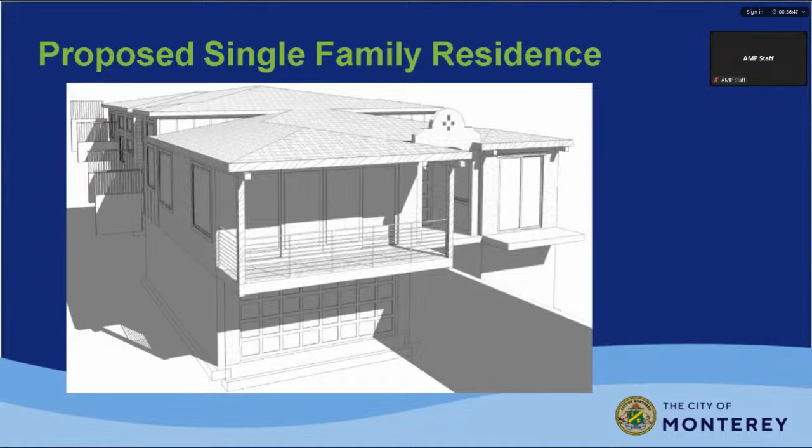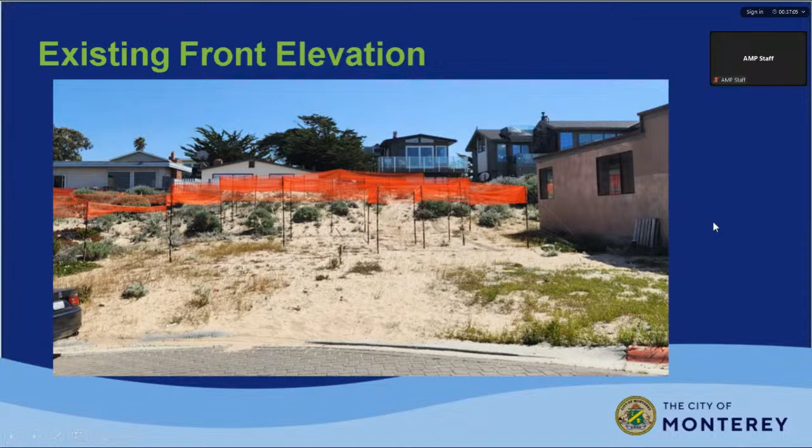The proposed single-family residence would be a main floor with a basement down below. The front elevation shows the primary main floor, and there would be somewhat significant excavation down below for the subfloor area, similar to nearby properties in Del Monte Beach.

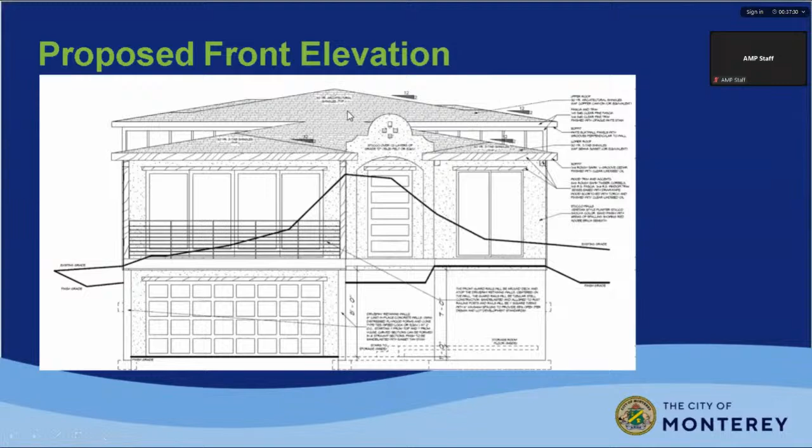The proposed front elevation has a front deck area here, the primary entrance here with a pathway going to the front. There would be a driveway going down to a two-car garage down here on the left, and the building would go up the slope to the rear as depicted here.

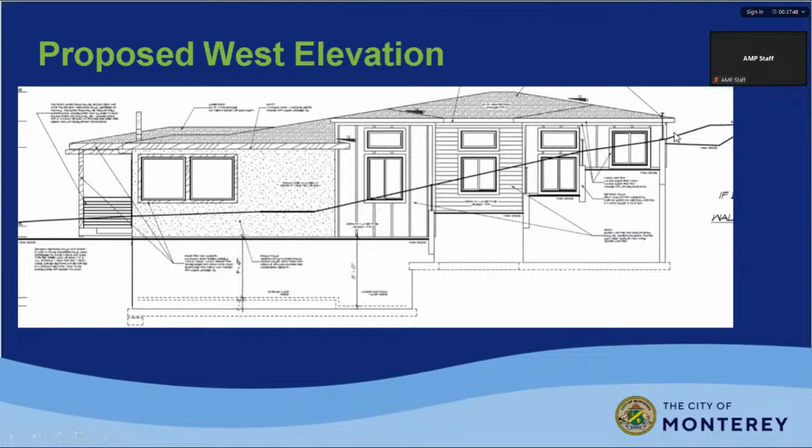There would be a combination of stucco and wood paneling, and the rise of the roof would go up with the rise of the slope to the back, where there would be a small portion that would project above the grade. So this back area would wind up being a retaining wall, and then further forward it would step down to the garage area.

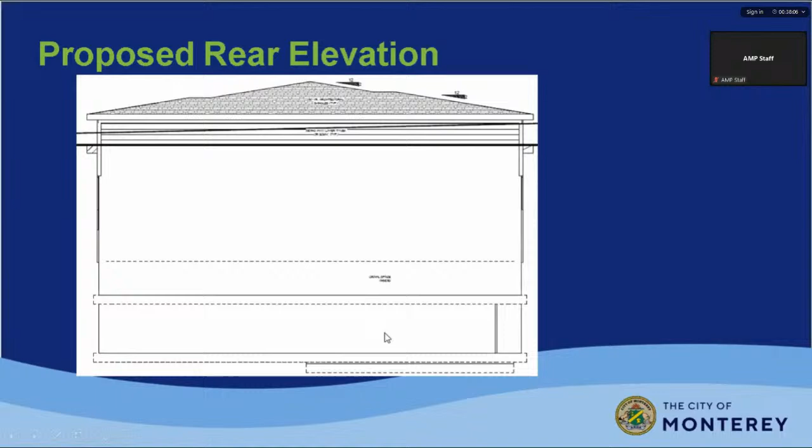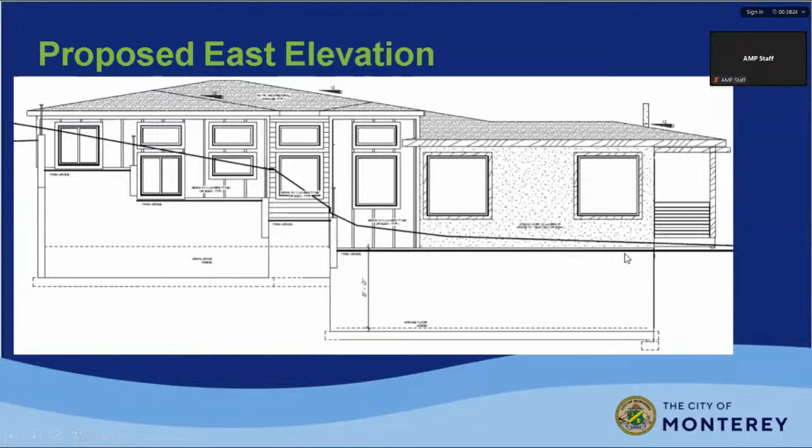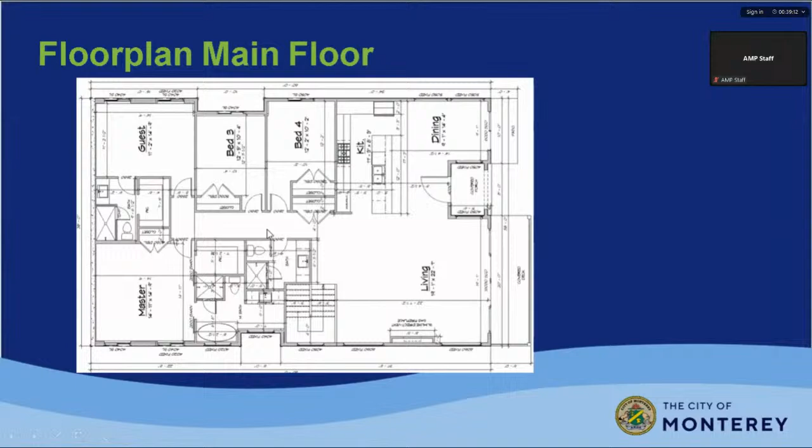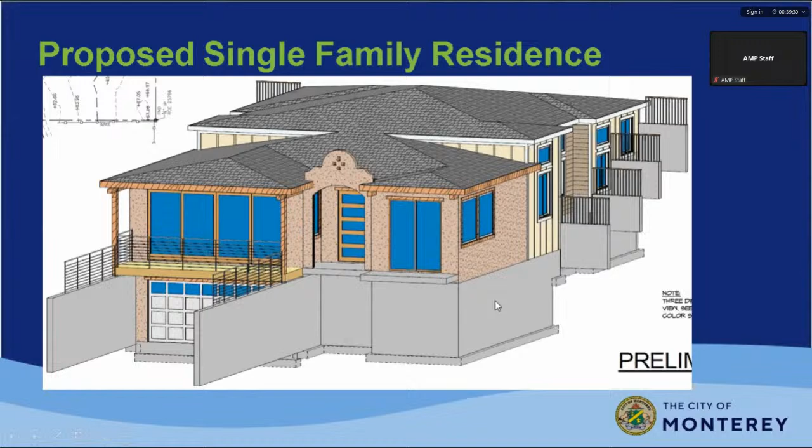There are a series of findings required for approval from the Architecture Review Committee, including that the proposed siting, form, mass, and architectural style are appropriate. The project as proposed meets all of the development standards. There's an asterisk because we have a clarifying condition that we included.

But each of these defer to the Del Monte Beach, Monterey Shores neighborhood development standards. And this area in particular is subject to a few height and setback constraints that were codified a little over 20 years ago.

The views, privacy, and living environment must be found to not be significantly impaired. One comment was received prior to the last meeting with concerns about the story pole height.

The applicant had a surveyor go out, and the poles were indeed incorrect. The poles were revised, brought to the correct level, and a stamped survey was provided to the city confirming that the story poles are now the correct height. We have not received a follow-up concern about the story pole height.

However, we have received one other comment letter with some view impacts, which I'll go over in a couple slides. I mentioned that there was a map for this area. On the right, you can see there is a maximum vertical building envelope allowed for the property. Lot 11 here is allowed to go up to 71 feet in elevation.

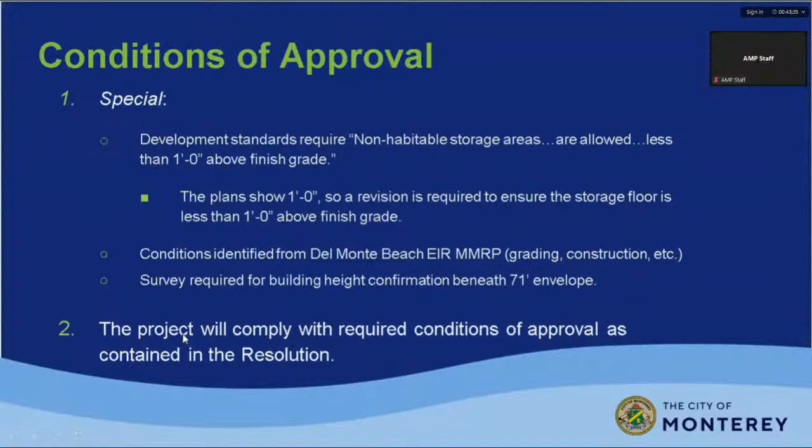The project would otherwise comply with the standard conditions of approval placed on other projects. We received one public comment letter following the initial one about the story poles, with concerns about the setback and slope—that 5 feet was rather close to their property line—and a request that the front setback be reduced so it could be moved further away from their property.

As I mentioned before, the map is very clear about the setbacks, and going for a setback variation is not possible. It would be extremely complicated to go back through the EIR process for that.

There were concerns about vibration and structural damage, and an excavation and shoring plan being required. As mentioned, there are a series of special conditions, 2 through 15, placed on this project for those items. Finally, there was a concern that a fence may be installed in the future on the rear property line that could impact their view.

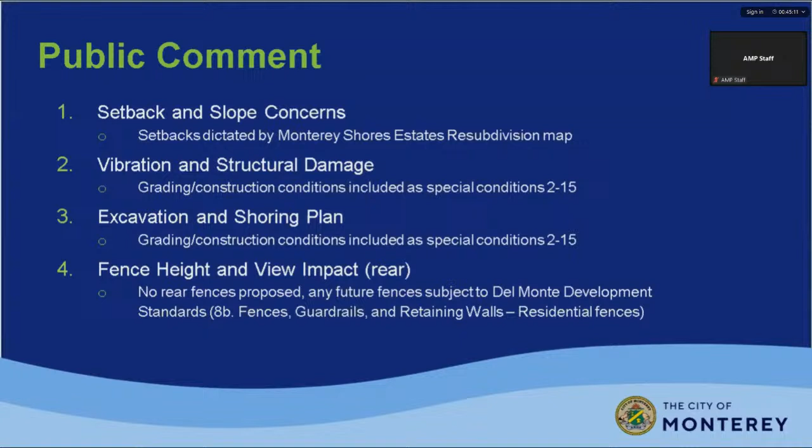As proposed under this project, there is no fence proposed along the rear, and any future fences would be subject to the Del Monte development standard document, specifically section 8B regarding fences, guardrails, retaining walls, and residential fences. So if something came up in the future and there was a complaint, we would send code enforcement to ensure they were going through the right process.

With that, staff's recommendation is that ARC adopt the resolution approving the architectural review permit and conditions of approval. That concludes staff's presentation. I believe the applicant is online, and if you have any questions, I'm here. Thank you, Matthew. Matthew, any questions?

So the water for this site is allowed to be there. It is, and Fernando may be able to talk a little more about the history of this area, but water is allowed at this site. Yeah, there was a development agreement approved by the city council that gives water to this property, and it's been renewed because this EIR is from 1998. So it's been renewed and kept alive.

If there currently isn't, there is one allowed to be placed there.

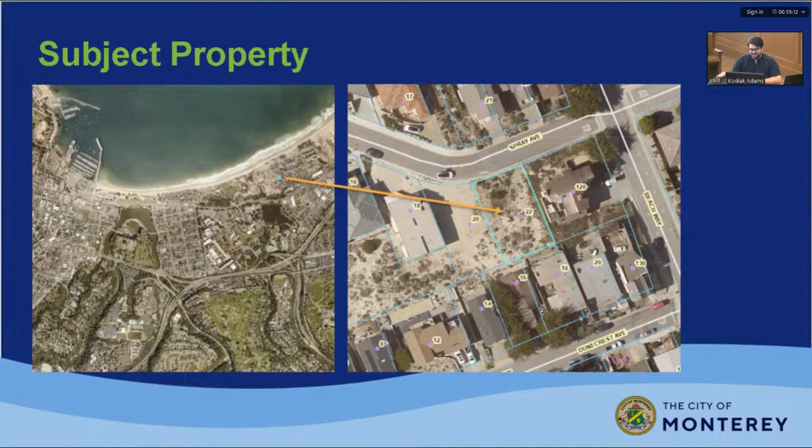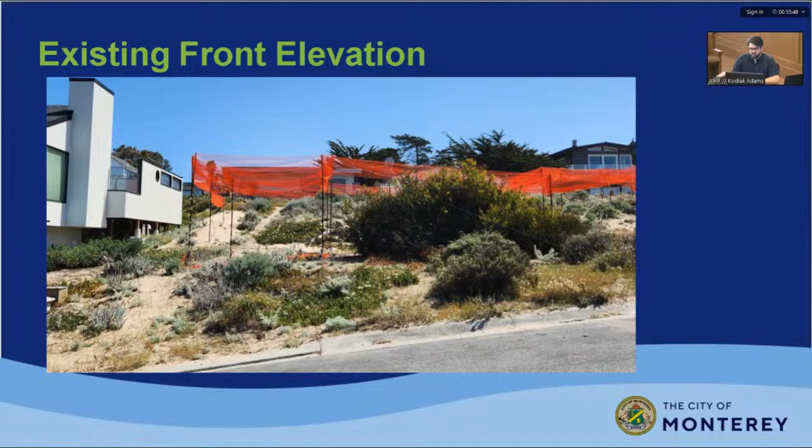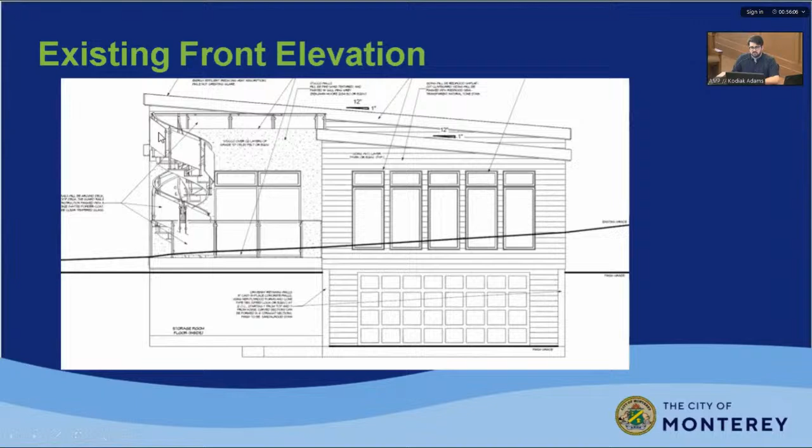Here is what the project would look like. As mentioned before, there would be a downslope driveway from the left to the garage door on the right. There's a spiral staircase going up to a rooftop deck, and these would each be glass here, and the slanted roof.

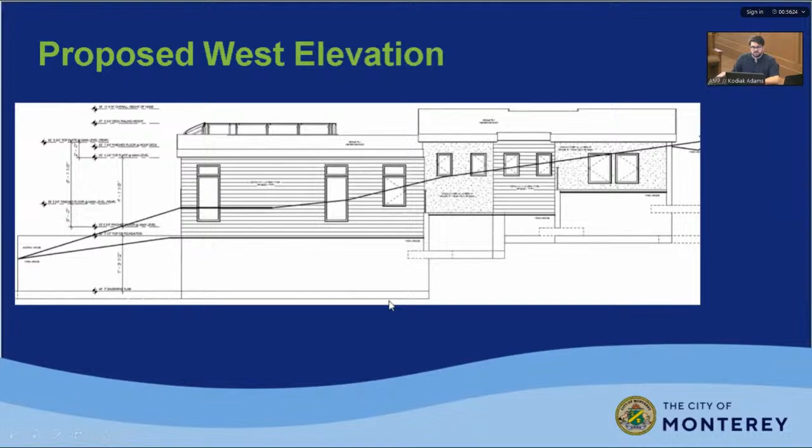The project would similarly go up the site, and you can see the basement slab down below with the garage, and there is a tiered retaining wall system going up towards the rear of the structure, where it would slant from left to upper right.

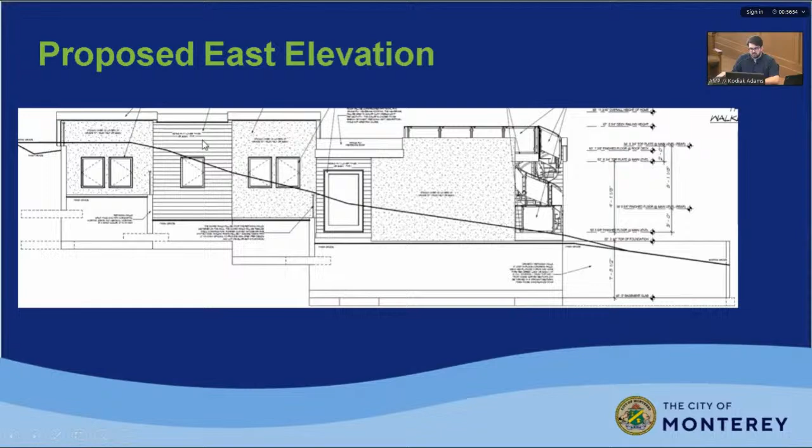The proposed east elevation is here. The front door is located on the side of the house for this one with a walkway to the front. And again, you can see a combination of stucco and wood siding with a slightly different color scheme, but still similar neutrals and grays.

The lower floor plan, here we have the garage, this time on the right of the structure, and the storage area over here. There's also a stairway that goes up. I will note the same condition that was on the other one, where it needed to be less than 1 foot, is also included for this project for that storage area. Oh, and the crawl space is the same as well on the left.

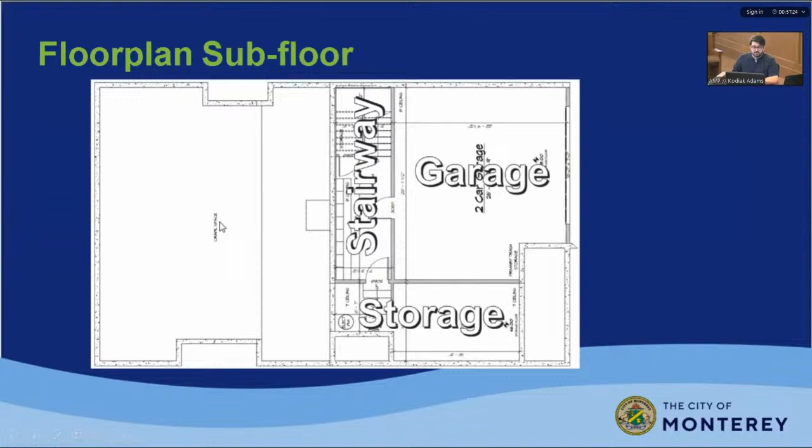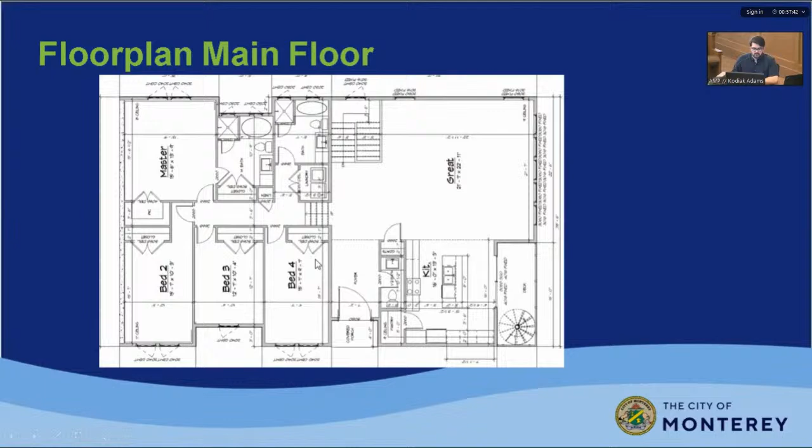The great room would be at the front next to the windows that were indicated. The kitchen would go out to the balcony area, to the deck with the spiral staircase up to that rooftop deck above the kitchen. And there would be a number of bedrooms and a master bath and a master bedroom. Here's an alternative angle, and here you can also see the retaining walls going up the slope.

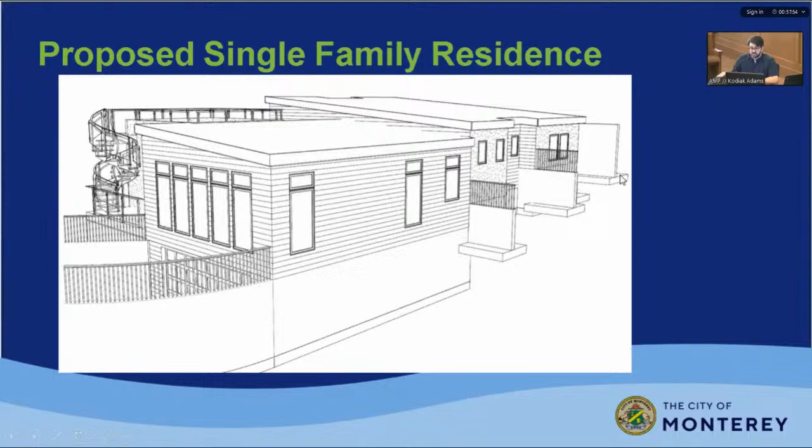Findings required for approval are that the siting, form, mass, and architectural style are appropriate. All features of this proposal were also found to be consistent, adhering to that maximum height requirement for the Del Monte Beach area. Views, privacy, and living environment should not be impaired. The previous comment that was noted about the story pole concern was directed at this property as well.

Since the revision of story poles, we have not received a comment in writing about concerns about the height. Otherwise, it does adhere to the envelope from the final map. Unlike the other site, this one drops down a little bit with the topography to a maximum height of 69 feet. The setbacks on the rear are 5 feet from both of these sides. However, it is otherwise indicated as 10 feet from this side, on the east side of the property, and the plans do adhere to that. And there's a 20-foot setback in the front.

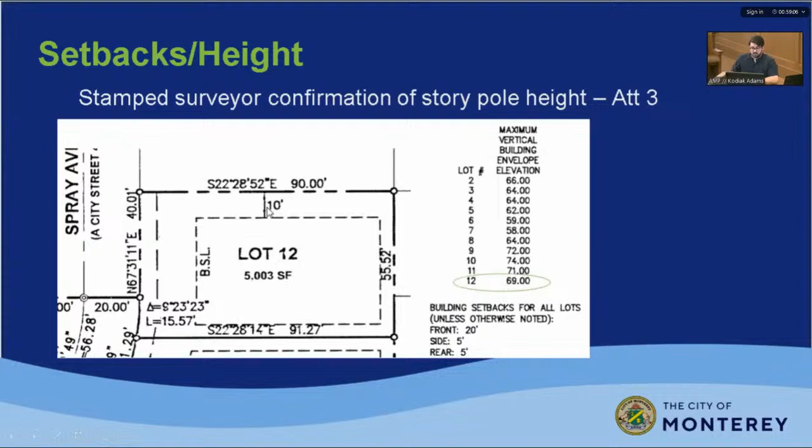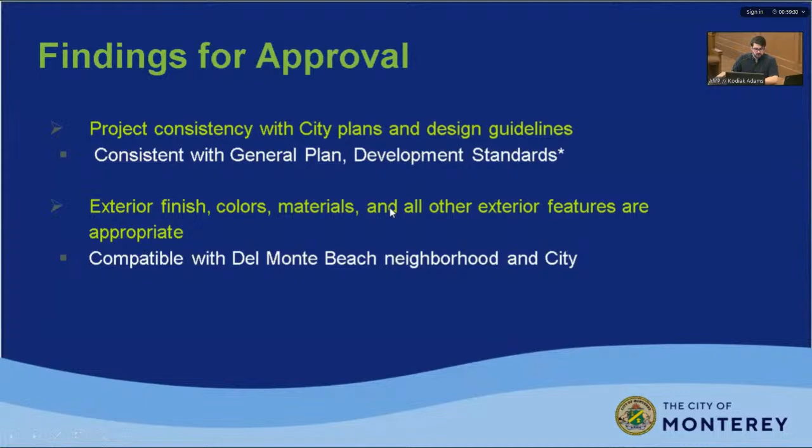The project must be found consistent with city plans and design guidelines. It is wholly consistent with the development standards from that neighborhood plan, except for the special condition. The exterior finish, materials, and other exterior features must be found appropriate, and staff found they were compatible.

There is a special condition about the 1 foot above finished grade, and the plans show 1 foot, so revision is required to ensure that it's less. There was one other note included in the plans marking a maximum 7-foot high ceiling for the storage area and maximum 8-foot high for the garage. Staff would like it depicted on the elevations as well. It was included on the plans, nothing was wrong, just wanted it to be cohesive throughout the document.

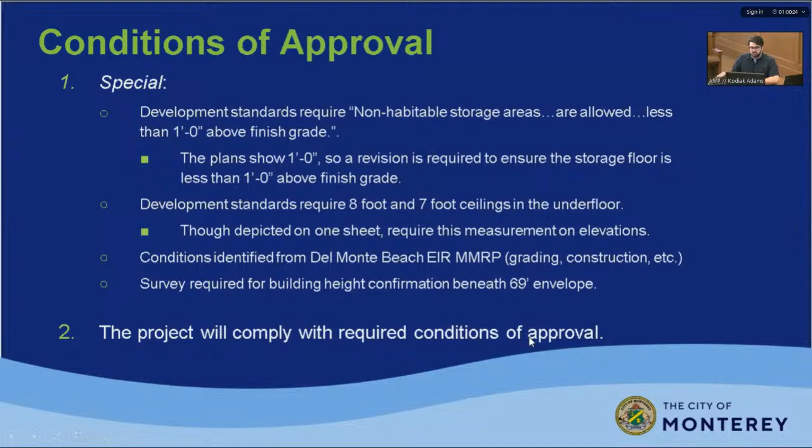Similar to the other project, those conditions from the Del Monte Beach EIR MMRP for grading and construction are included here as well, in addition to the survey required for the height confirmation for the 69-foot height limit. Otherwise, the city standard of conditions also apply to this project.

The previous public comment that was noted was also directed at this project, and the same responses are included here as well for setback, slope concerns, construction related items and excavation, and fence heights. There is no proposed rear fence for this one. Anything that comes up in the future would need to adhere to the Del Monte development standards.

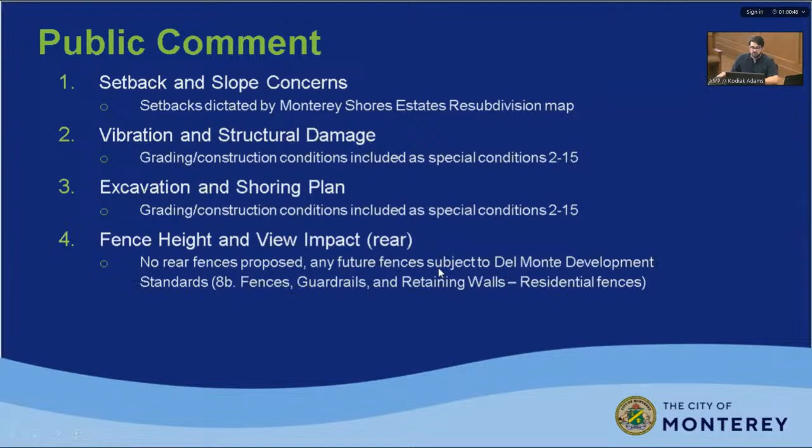With that, staff's recommendation is that ARC adopt the resolution approving the architectural review permit with conditions of approval. This concludes staff's presentation, and the applicant is here. Thank you, Matthew. Matthew, any questions?

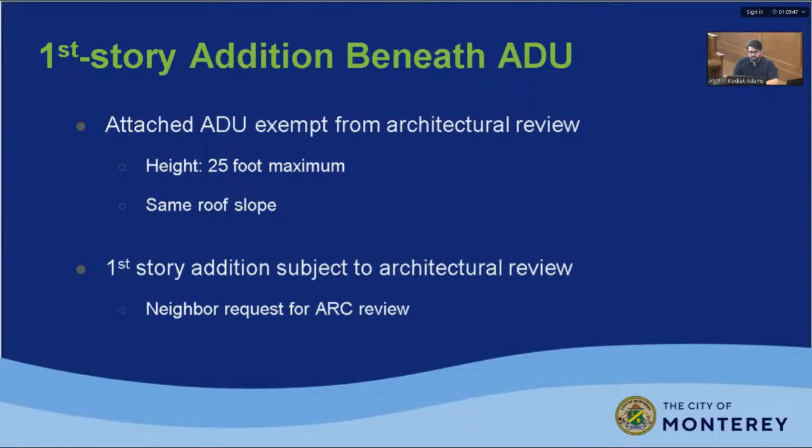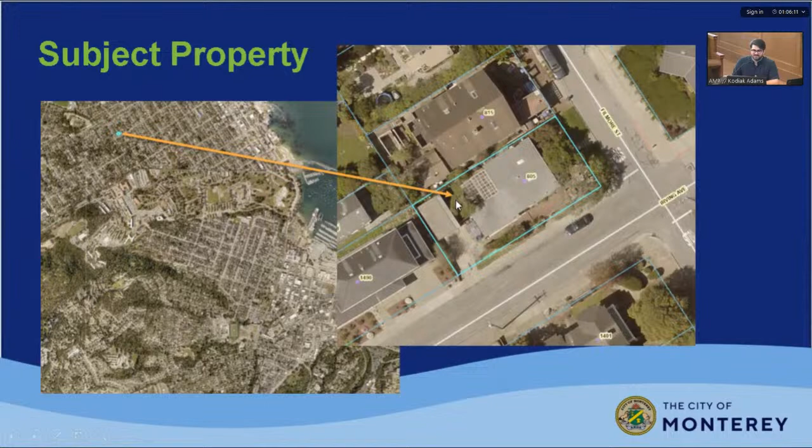The subject property is in the western portion of the city in New Monterey. The zoning here is R3. There is a detached garage in the backyard and the primary dwelling in the remainder of the property. And there is a tree that is also included in this application for removal.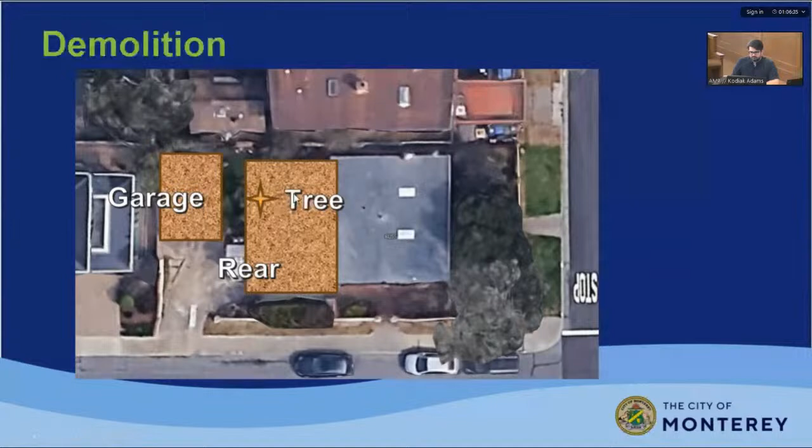Here is another aerial of the site. As part of the project, the garage would be demolished and the rear portion of the structure would be demolished and the tree would be removed for the project. The project includes, in place of that rear portion of the structure, an owner's suite and an entryway and a laundry going to a newly constructed garage. And then on the rear of the structure, there would be a staircase that leads up to the accessory dwelling unit upstairs.

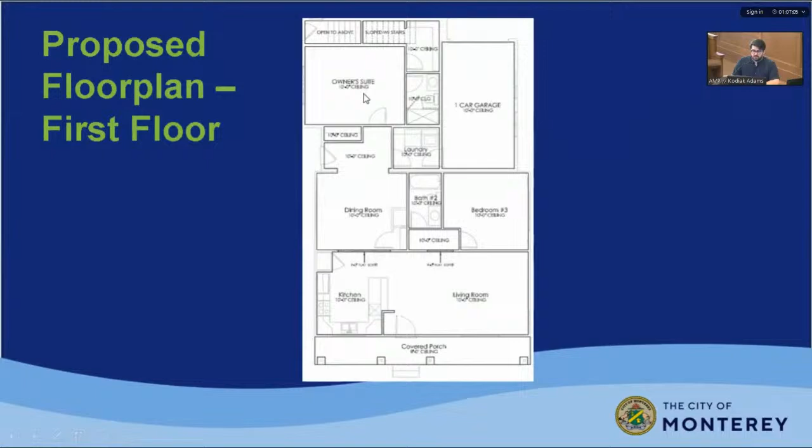On top, directly on top of the owner's suite, entryway, laundry, and garage is the ADU to be proposed. You can see the stairway here. There's a window proposed in the back, living area, kitchen, ADU, and a covered deck in the front.

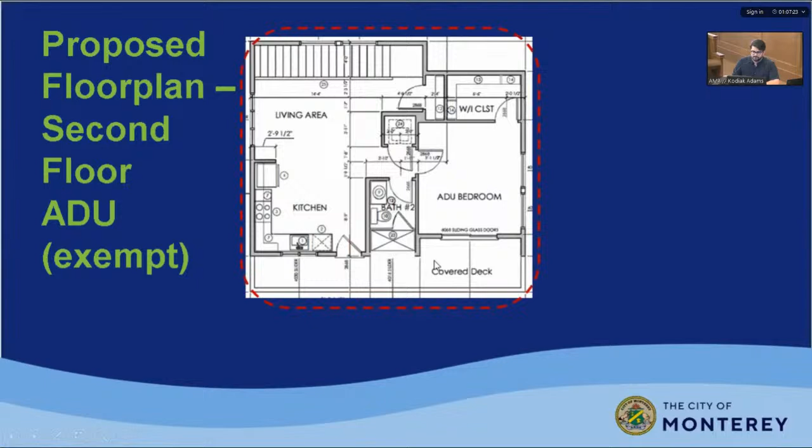Facing Filmore, so the front of the primary dwelling, it would go from the current one story on the left to a new structure on the right. The ceiling would be raised using a truss system for a roof skylight, and you can see the slightly higher roof in the back.

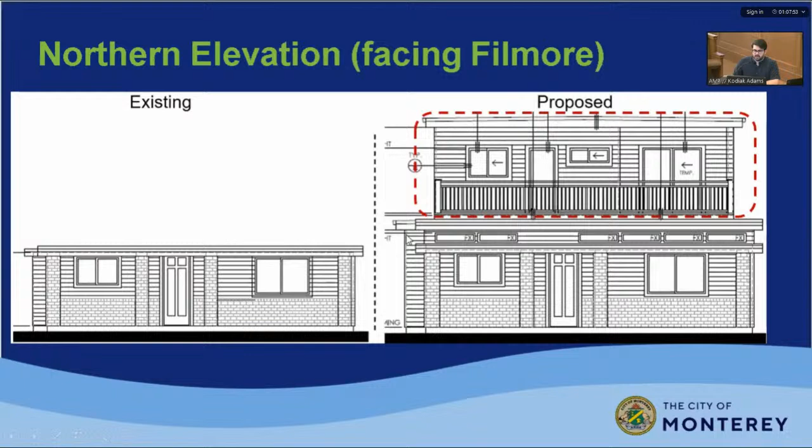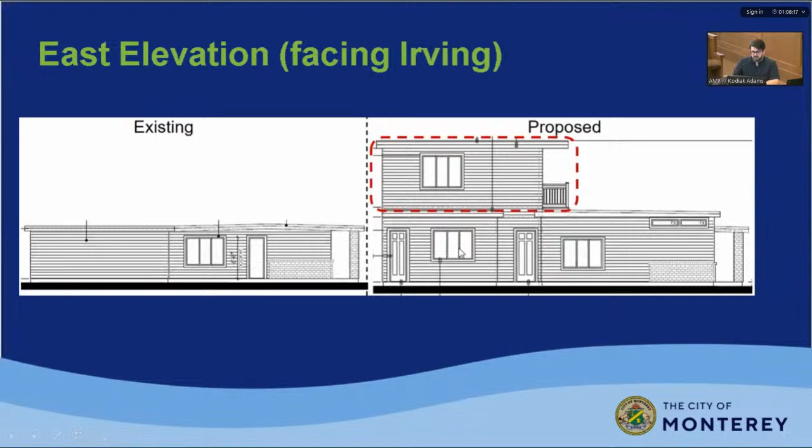From the east elevation from Irving, you can see some alterations to the doorways and windows. For instance, they are swapped between the two here. On the far left, you can see the independent door to the ADU and a new window that's installed for the master bedroom.

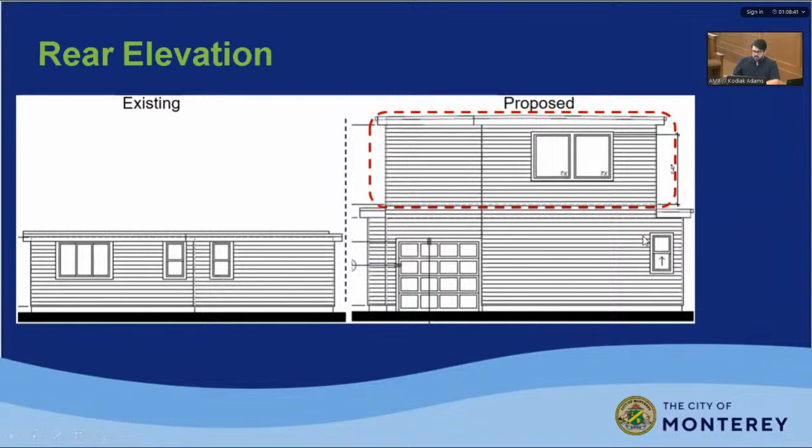The rear of the structure would be changed from this somewhat L-shaped primary dwelling to, you can see the new covered garage access on the left, and then a small window on the first story on the right. And there's the proposed windows above the staircase for the ADU.

And then finally, the west elevation, some alterations here where there was a door in the back leading out to the backyard, which would now have that garage with 2 windows installed as well.

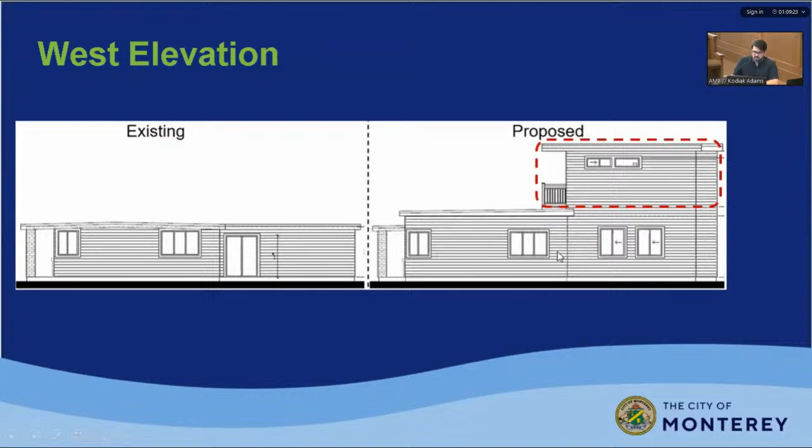Findings required for approval are that the proposed size, form, mass, and architectural style are appropriate. As I indicated before, the paneling would be refreshed and extended along the entire width of the structure. It does meet all of the setbacks for a first story addition to a home, and maintaining the covered parking is also required.

The massing and scale is compatible with the single family neighborhood and also multifamily residential neighborhood. Views, privacy, and living environment should be generally found to not be significantly impaired.

We have received 3 public comments on this project. One regarding a desire for ARC review, which is why it's before you today. And then 2 that are regarding the second story addition associated with the ADU.

The project must be found consistent with city plans and design guidelines. Staff did not find any inconsistency with the general plan or development standards. The exterior finish, colors, materials, and all other exterior features must be found to be appropriate. Staff found them compatible with the new Monterey neighborhood.

And finally, for tree removal, in situations where even healthy trees prevent reasonable development of a permitted use, the tree may be removed. The project includes a permitted use, the habitable area, and attached garage, which are considered reasonable development, and maintaining the tree would prevent reasonable development of the site.

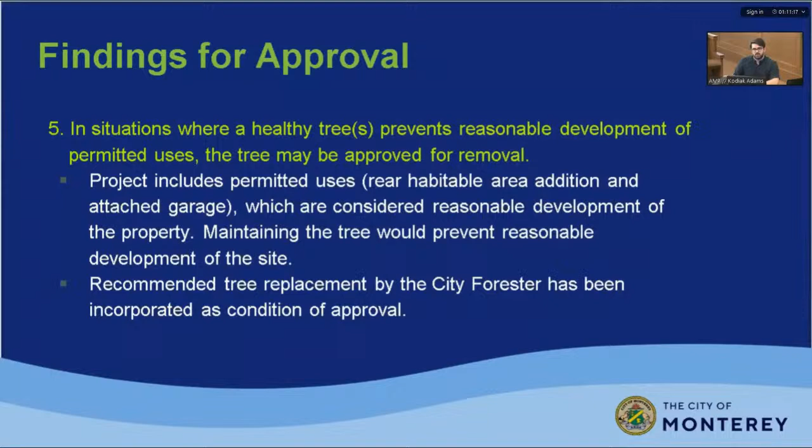As noted here, conditions of approval, special: the city forester recommended tree removal replacement of 1-to-1, and the replaced tree would require coordination with the city forester. The project would otherwise be required to comply with conditions of approval as contained in the resolution.

With that concludes staff's presentation. The recommendation is that ARC adopt the resolution approving the project.